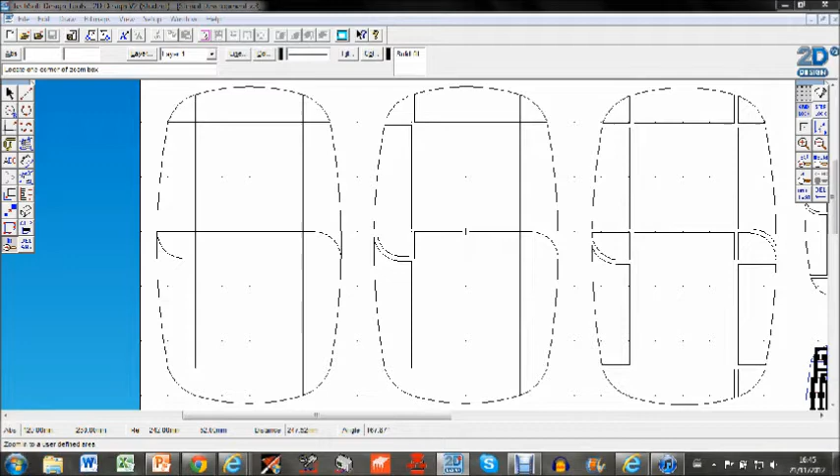Hello, I'm now going to talk about the development from a conceptual idea to actual hardware design for the optoelectronic output of the numbers. So this here is the shape of the digit as was explained in the other video, and the problem now that we have with using LEDs is that their light disperses in all directions. So in order to keep a distinction between the segments, we have to put gaps in the segments, such as there.

So in my initial development I started to put gaps in, and I did that by taking material, or area I suppose, away from the smaller segments in the corners and in these locations on either side. But I then realised that that would probably be more obvious than if I took it away from the bigger area segments, because it's a greater percentage of that segment area being taken away. So that's then what I did with this design here, and you can see the gap.

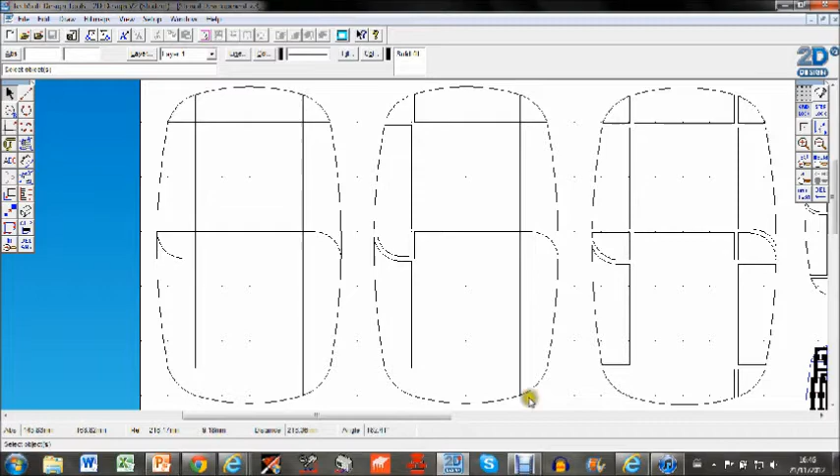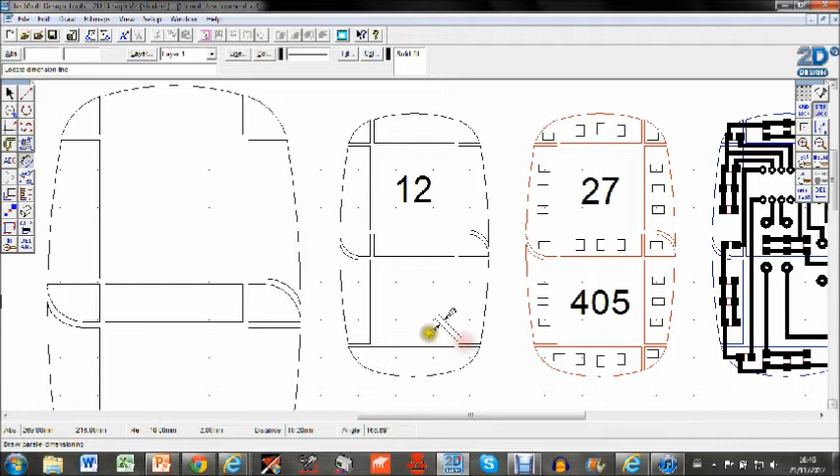I then shrunk that design down to this size here, and this is the size that the actual digits want to be. So this component is 70 millimeters, 7 centimeters, by 40 millimeters or 4 centimeters, and as you can see it's a 12 segment display there. So with the segments now the right size and with a spacing between them, that spacing there by the way is 1 millimeter spacing there.

So then I moved on to the positioning of the LEDs, and because I'm going to be hand soldering these I chose to use 1206 LEDs because they're the biggest regularly available package size. That 1206 means it's 0.12 by 0.06 inches or 3.2 by 1.6 millimeters. So these boxes I just drew on as 3x2 mil for easiness, and then I tried to get an even distribution within each segment, because they're point sources of light, so it would hopefully diffuse and get a constant brightness across the whole segment.

So I've got 3 in these segments, 4 in that one which is an extra big one, and then a single LED for each of the smaller segments, and that amounts to 27 LEDs per number. And if I have 5 numbers for 5 hymn numbers and 3 digits per number, that's 405 for the whole thing. So you can see that these things really do add up.

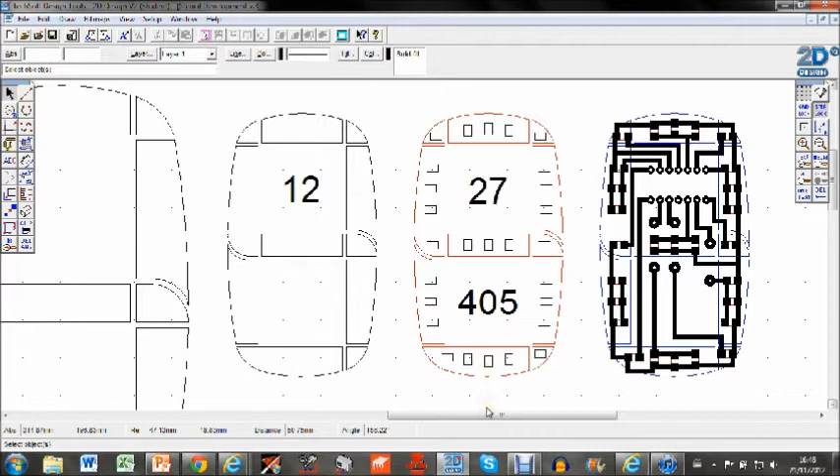So with them positioned, I then moved on to designing their power supply. So first thing to do is add pads around each end of the LED, so those were all added, and then I did the track around the outside which connects to one leg of each LED, and that's going to be the common, probably common cathode, because that's what's most readily available.

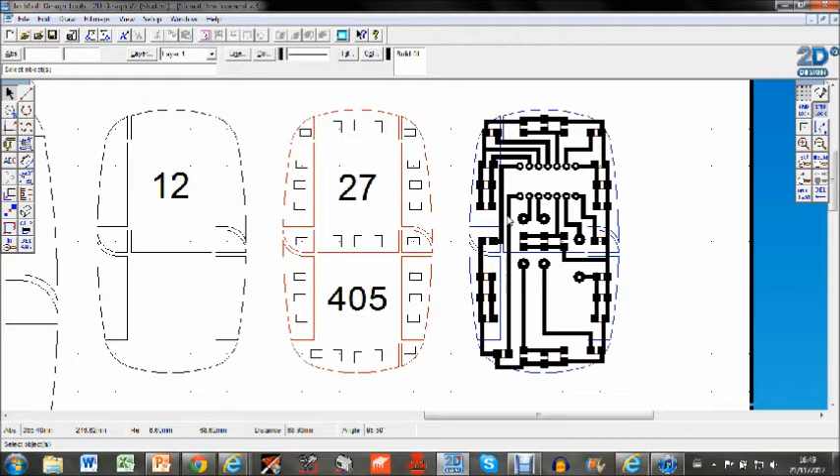And then I developed the power tracks, so connecting each of those for each segment together, and then I've just connected them to some pads which will be a through-hole connector, so I'll have that as a dual socket, and then I can just plug a wire in and connect it up to a power supply. And these here are just for flying wires because it was difficult for me to route everything round, because I've been limited to using 1 mil wide tracks because it's going to be manufactured at school, and our PCB manufacturing is not very precise, so we need about a 1 mil track for that to hold. So yeah, I've got the track layout there.

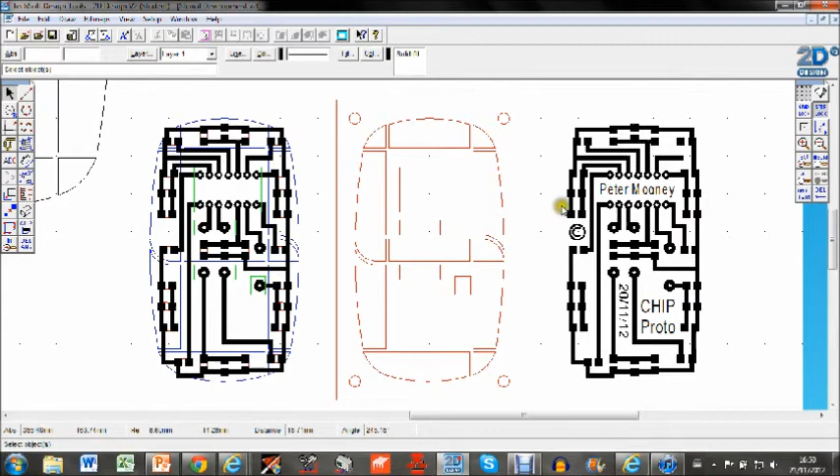To create the segments I'm going to have a piece of perspex with the holes for each segment cut in it, like you can see there, but I realised that these through-hole components will be projecting up on the top side, so I put boxes around these and then incorporated those so that the piece of perspex can sit flush with the PCB. And I've also put holes in the corners so I can just use an M3 bolt to hold it all together. And from this I also extracted the plain PCB design for the actual tracks and added some text, and that's what will be manufactured in the PCB manufacture process.

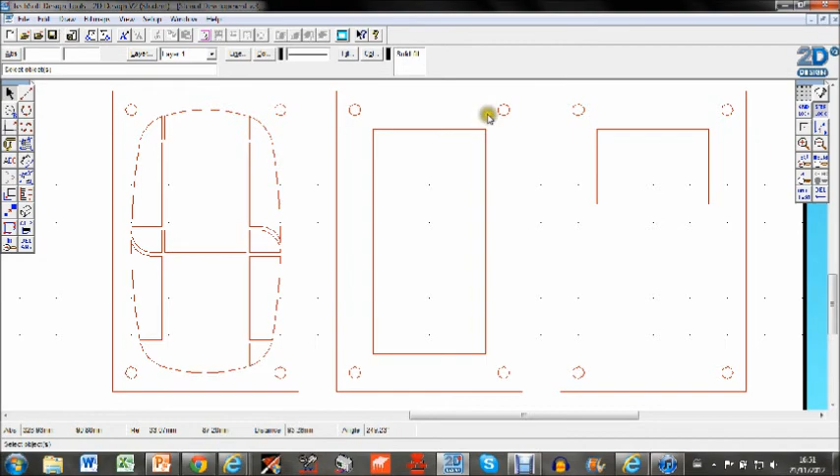I also then developed some other pieces, so this is a piece to go on front of this one as an extra layer, so I can increase or decrease the distance between the LEDs and the diffuser material, so I can experiment to see which is going to work best in terms of distance. And then these pieces are just to go on the back behind, so it gets a whole complete unit.

So that's the development from initial concept of shape through to PCB design and a stencil in effect to channel the light into the correct shape for the segments, and then that will have a diffuser stuck on the top of it to hopefully get a nice consistent illumination to each part of the segment.